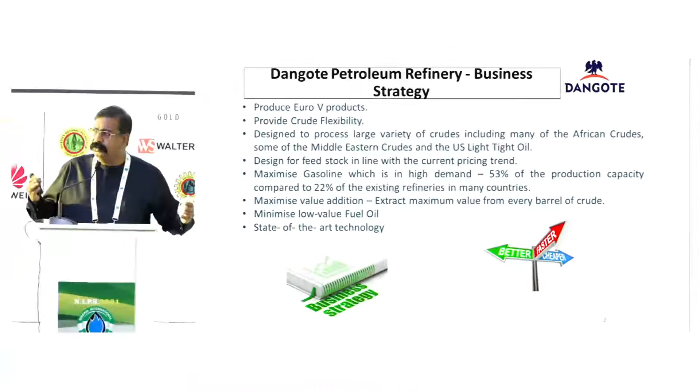This is to briefly give you an outline of the business strategy behind the refinery. The first strategy was that we should go for the best of the products, which is Euro 5. As you know, even in Europe many refineries are still trying to upgrade to Euro 5, and some don't have a plan to upgrade to Euro 5 but rather phase out the refineries. Because we were going for a huge volume, and we know that we will have to export a substantial quantity of products after meeting the demands of all of Nigeria as well as West African countries, we will have still products to export, especially gasoline, aviation jet, and diesel.

Specifically aviation jet and diesel. So if you have to go to those markets, we knew that it's good to have Euro 5 products today, so that in future we would not have any impact on our marketing strategy. So 100% of the production is of Euro 5. As you know, today we are using mostly AFRI 3 here, and we are trying to upgrade to AFRI 4.

Number two, we decided to have total crude flexibility, so the refinery will not be dependent upon products from any one particular source. We can process most of the African crudes and some of the Arabian crudes, and for example, the US LTO we can take 100%. So we have designed the refinery with adequate crude flexibility, so there will not be any dependency on any particular specific crude source, because it's a very massive investment, and the money is primarily going out from the pocket of an individual. So we wanted to ensure that all risks are mitigated. Before we started the project, we spent a lot of time assessing every possible risk and how we can mitigate those risks. So that was one of the outcomes of that.

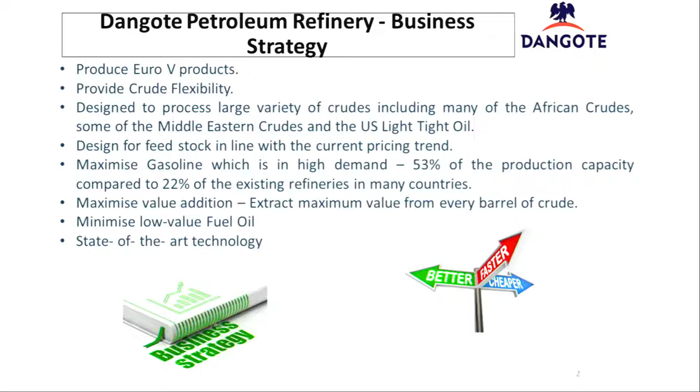Then the US LTO came in. As you know, the US was the biggest customer for Nigerian crude, our light and sweet crude. But then the US LTO came, they almost stopped buying the Nigerian crude and started pushing those crudes to other countries. Especially during President Trump's time, there was a very aggressive push, even to the Indian refineries, they started pushing. So the gap between the light and sweet crude and the dirty crude bridged. There was no point in going and investing heavily in dirty and heavy crude oil, in which case you'll have to have a coker, you'll have to have a VDU. So all those things we could avoid, and we built a refinery in line with the current trend.

Then we also looked at maximizing gasoline, because primarily we are building the refinery here, and the focus was initially the local market. Globally, most refineries are focused on diesel, which is the highest consumer product. But because Nigeria is totally different, with a gasoline-centric market, we maximized the gasoline production up to 53% of our production capacity, as against 22% globally.

And then we also went for another strategy, maximum value addition. So every barrel of crude which goes in, maximum value should be extracted out. If you see the black oil, the furnace oil, we used to call it here HPFO, LPFO, the volumes are extremely small. Whereas we have gone for even high-value products like polypropylene. So it has an integrated petrochemical complex. The value of the products extracted, they're all lighter products, petrochemicals. So the value addition is very high. That made the capital expense very high.

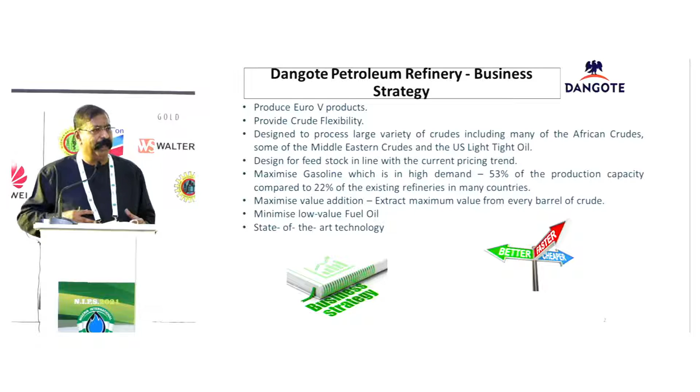So there was a lot of investment going in, and it made the complexity of the refinery very high. The Nelson index is quite high. But if you see the value extraction, it's also extremely high. So over a period of time, the margins the refinery can make is also extremely high.

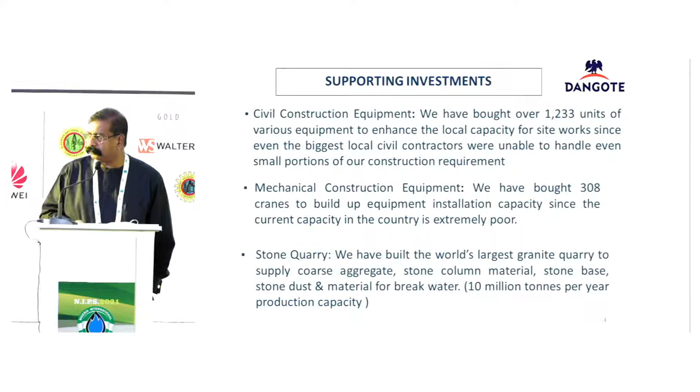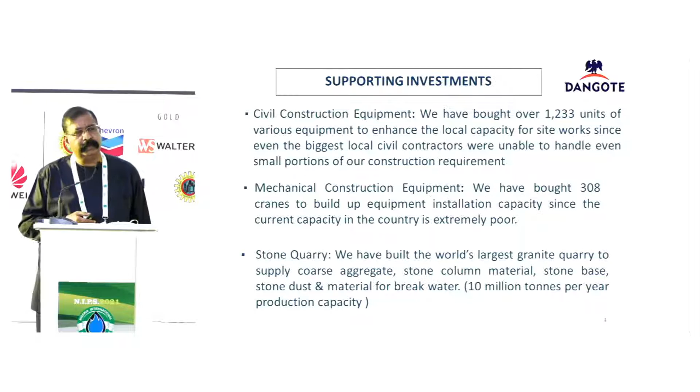And for the refinery, the capital investment became very high because we had to invest in a lot of supporting investments which are non-specific to a refinery. You can see civil construction equipment alone, we had to buy about 1,233 equipments just for civil construction, which covers dozers, excavators, front-end loaders.

Today, we probably have a larger quantity of construction equipment compared to large global companies, Saipem, Technip, JGC. We are almost equal with them, or we have a larger number of equipment.

Same thing with mechanical construction equipment. We had to buy about 308 cranes. You can count with your fingers the number of companies globally who have 308 cranes.

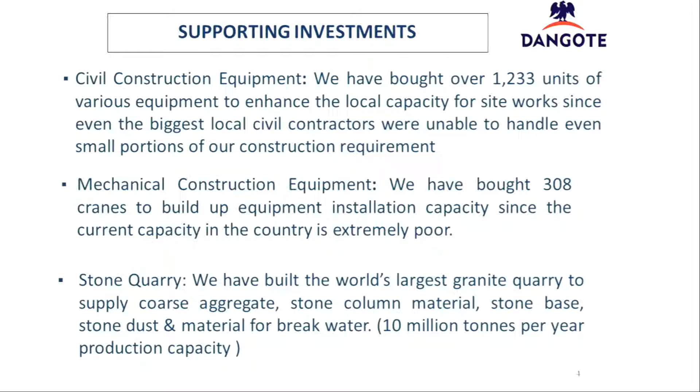At the stone quarry, we realized we would not be able to meet our demand of coarse aggregate for concrete production. So we invested in a 10 million ton quarry, which happens to be the largest stone quarry in the world. These are all investments which normally a petroleum refinery would not make. If you were constructing it in Europe, US, India or the Middle East, you would not be investing in all these items. But this made the refinery's overall investment quite high.

Then to move the sand and aggregates, we had to invest in another 1,000 tippers. For ready-mix concrete, we had to put up almost 13 million cubic meters per annum capacity, which is again supposed to be the highest capacity in the world in any particular location. Even in the Middle East, you will not see any area having 13 million cubic meters of concrete capacity, not even in an entire country.

And we had to develop a port because we decided to bring in huge sized equipment. The crude column, 110 meters, came in a single piece. The reactor regenerator, 3,000 tons, came in a single piece. The HRSGs, the heat recovery steam generators, almost as high as an 8-story building, also came in a single piece.

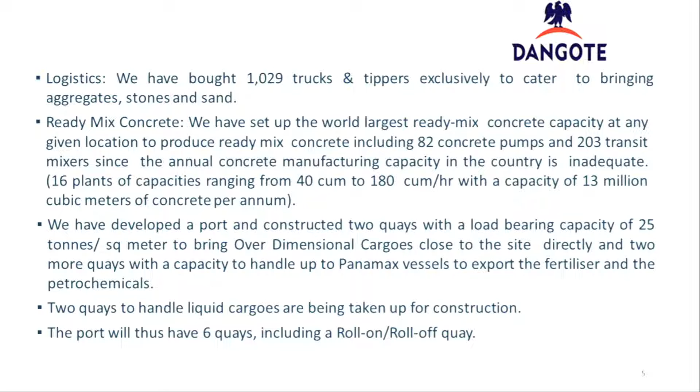So to bring those in, we had to construct a port. Normally Nigerian ports, which is the global standard, have a load-bearing capacity of about 2.5 tons per square meter for offloading containers, bulk cargoes or packages. This one needed 10 times that capacity, so we had to build a quay close to the site. We extended and built 2 quays for bringing over-dimensional cargoes. Now we've added 2 more quays totaling 220 meters each with a 14.5 meter draft, which can handle up to Panamax vessels.

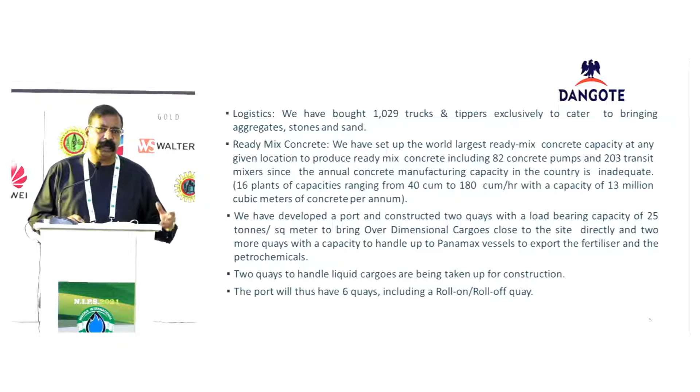So we can export fertilizer and petrochemicals from our site. We're also adding 2 more quays for liquid cargoes, since we already have a facility which we'll come to later. But if I have to take smaller cargoes to Warri, Port Harcourt, or Calabar, I don't need to use a huge SPM, so we're trying to build 2 more liquid cargo quays.

We even had to build oxygen acetylene plants because the welding gases in the country were not adequate. We had to build accommodation for 50,000 construction workmen on site. People thought we were overspending on construction accommodation and temporary housing, because of the air-conditioning, treated water facility, and sewage treatment for 50,000 people. You can imagine, it's not a small facility.

But it helped us a lot during the COVID period, during the lockdown. Every time, the people were all accommodated inside. So it did help us a lot.

In addition, the site was so bad that we had to develop swamp buggies too, since the swamp buggies in the country were not adequate, so we had to import them.

We also realized we are very close to the ocean, and as you know, with global warming coming in, Lagos is mentioned. If you just Google it, you'll see Lagos as one of the cities which can potentially start going underwater. So we decided to raise the height of the site by 1.5 meters across the whole area. We had to pump in more than 60 million cubic meters of sand to elevate the height, which cost us another 300 million euros exclusively for that one.

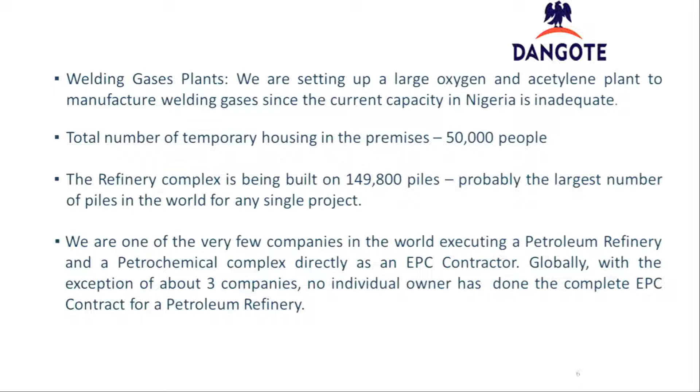Of course, we had a reason to do it, because we know when we go to these big companies, first of all, they charge a huge premium. For this project, at 650,000 barrels, they said the capex would be about $30,000 a barrel, so it would cost about 19.5 billion, and they'd charge us about 10% minimum as a fee.

They said it would cost us about $2 billion just for the EPC fee. When you sign a contract, all the risks they mitigate - they will not take 100% of the risk. They will cap their risk to maybe a maximum of 15-20%. So you pay a fee and still take the risk back on yourself.

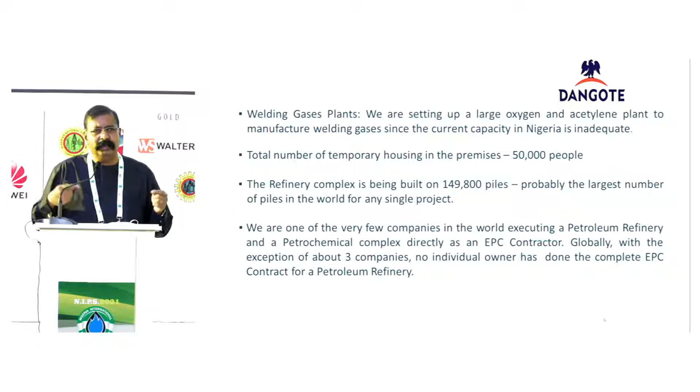So we decided we'll take the full risk and do it ourselves - the same reason we did for the construction equipment. Why did we have to buy it? If I give it to a contractor, they bring their equipment, I'll have to ship it in and ship it back, and they'll just depreciate the whole cost of the equipment on one project. Plus they may be bringing old equipment which can break down and affect my progress. So we decided to invest in brand new equipment.

So there were reasons behind all these decisions, which is actually helpful for the project. And the infrastructure is quite high.

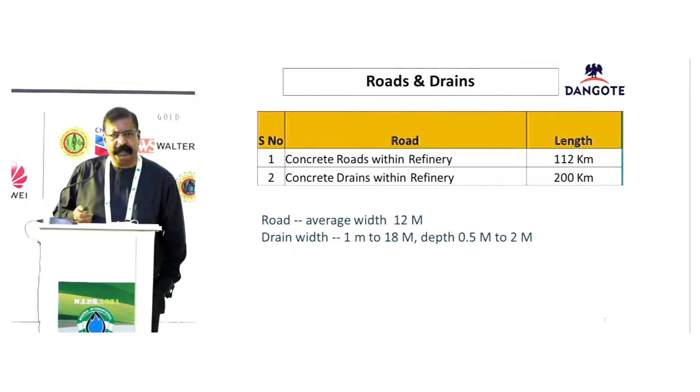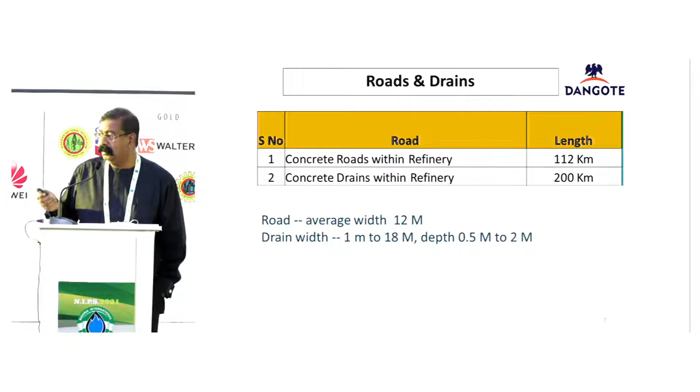I talked about the sand filling, more than 60 million cubic meters. Within the refinery, we have 112 kilometers of concrete roads, 200 kilometers of drains, and they are not small. The roads are about 12 meters wide. Drains are as narrow as 1 meter - some as wide as 18 meters, and some as deep as 2 meters. You can see they are like mini canals.

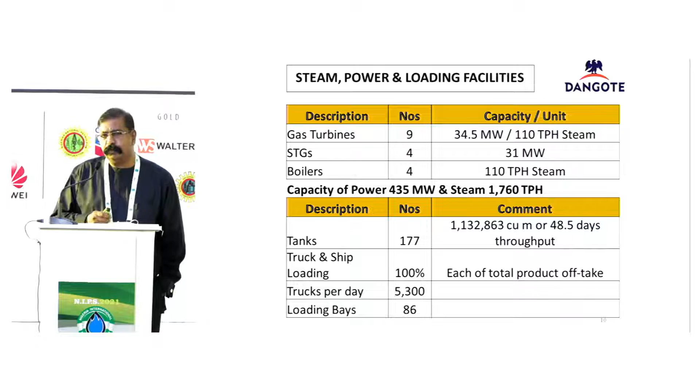Then the steam and power facility - we are building 435 megawatts of power within the refinery. We have 9 gas turbines, 4 steam turbines, and then the tank farms. We have 177 tanks. Then the product evacuation.

We have built total flexibility. 100% of our production can be evacuated by sea. 100% of our production can be evacuated by road. So depending upon demand, we have total flexibility.

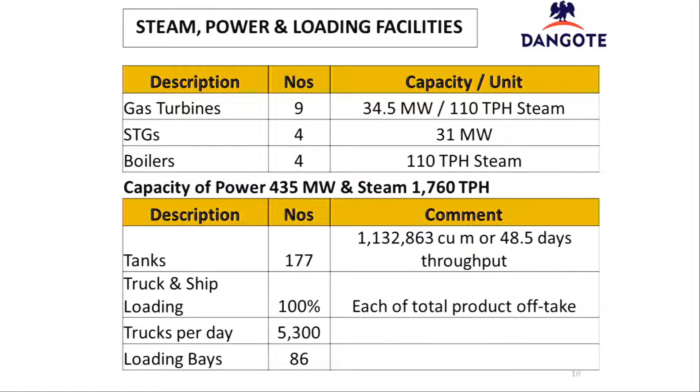Then we have the marine facilities. To bring in the crude, we have 2 crude SPMs, and to export the products, we have 3 product SPMs. We had to do about 120 kilometers of subsea pipeline to receive the product from the crude SPM and to take out the product from the product SPMs.

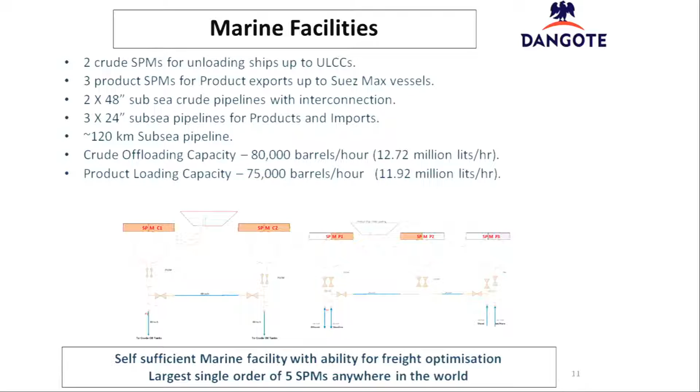For product, normally the biggest vessels handling product are like LR1, Suezmax vessels. We can bring a Suezmax, and we can load a Suezmax in less than a day. I can offload a ULCC in less than a day. So the vessels that come in offload within a day or load within a day and leave. The freight cost will be very substantially low because the waiting time is extremely low.

And I talked about the 177 tanks - this is the storage capacity. We can store up to 11 days of Nigeria's total consumption of gasoline, and up to a month's requirement of diesel, and about 22 days of kerosene requirement. So this will actually act as a kind of strategic reserve for the country. We have built in substantial storage capacities.

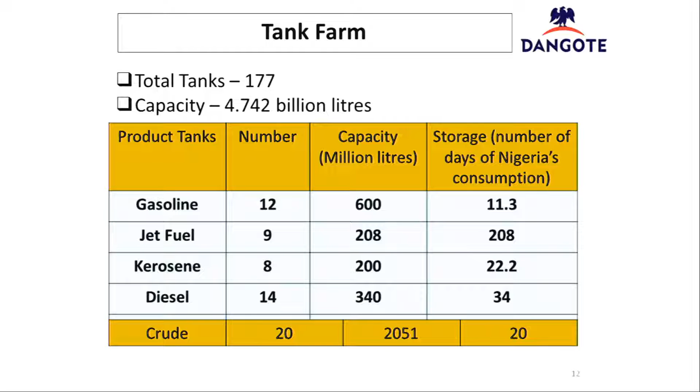So now we'll come to the critical issue which people are quite interested in. Yes, we are talking about this refinery - where are we? When are we going to finish the refinery? When will production start?

The journey so far: 100% of the piling work has been completed. 98% of the RCC work has been completed. Tankage, 94.6% completed. Structural steel, same, 97% completed. The underground piping, almost 100% completed. Now above ground piping is 80% completed. So currently the focus is on above ground piping, followed by electrical and instrumentation.

You can see the overall project progress. If you look at the EPC portion, 95% has been completed. Then if you take the enabling works - infrastructure, marine, construction facilities - all put together, almost 90% has been completed. But the critical activity is the construction, because engineering has been done, procurement has been done. The focus currently will be on construction.

If we take construction alone, we have completed 79% of the construction, so 21% is left out. Out of that 21%, not all of it is essential for commissioning the refinery - there may be some road works which are not critical for commissioning. So if you take the remaining functional scope, it is 16.58%. That is what our focus is upon to finish and start up the refinery today.

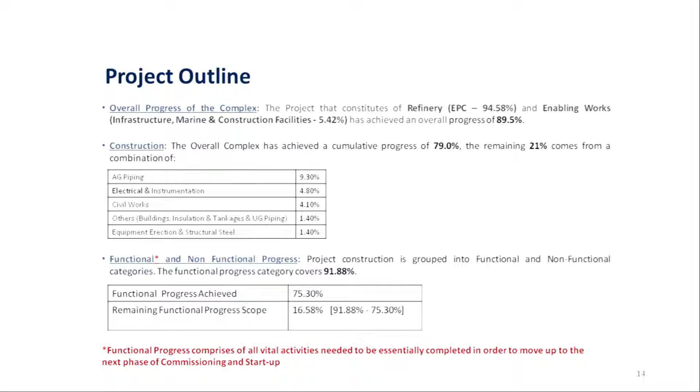We can see the breakup again, same as I described. Equipment erection is at 82%, so we have some balance to finish. Above ground piping is at 80%, which also has some balance work left. The rest is more or less finished. The other areas we're focusing on are electrical, instrumentation, and insulation.

We've been given a target date for electrical, instrumentation, and insulation. We want to finish it by 30th November of this year.

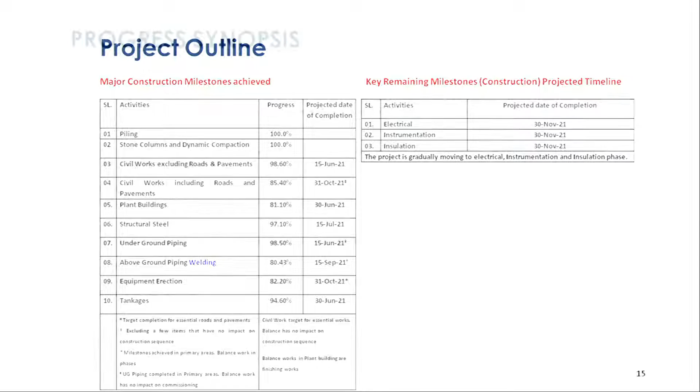I talked about the same completion progress, but the mechanical completion target is to finish by the end of this year. To achieve that, we have to start the test packs, like compressed air blowing of the pipelines, followed by commissioning the boiler and steam blowing of the pipelines, and hydraulic testing of the pipelines. We've already started that in parallel.

You can see the overall test packs. We're estimating about 15,400 test packs in total. Out of that, in the finished product tank farm, 128 test packs have been completely finished, including mechanical and hydro testing.

In the primary blocks, which is the crude distillation unit, the resid fluid catalytic cracking, the motor spirit block, and the mild hydrocracking block, out of 989 test packs, 931 have been finished in mechanical completion, and 893 have completed hydro testing.

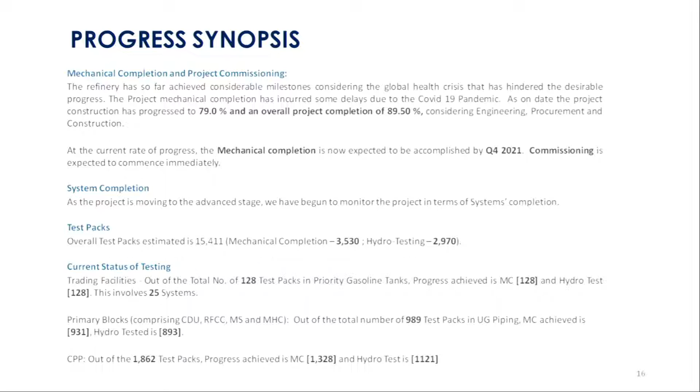Then the CPP, the captive power plant, out of 1,862 test packs, 1,328 have been completed and 1,121 hydro testing completed. That gives you an idea of the progress. It's not just mechanical completion, but also the test packs to be done so we can switch on the plant. So we're already doing that work in parallel.

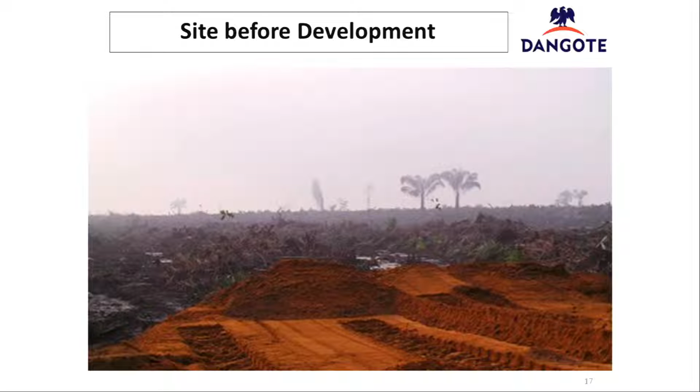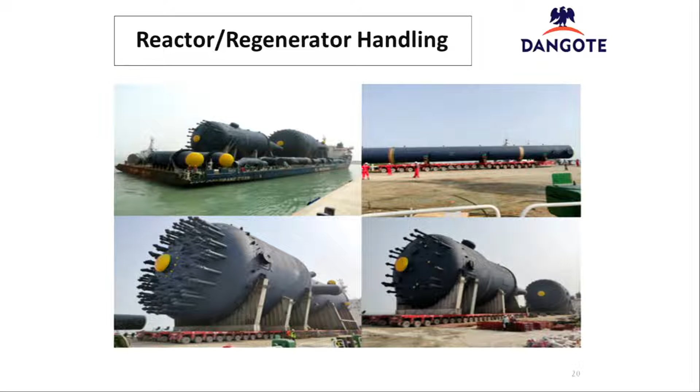This is a 3,000-ton piece, which came as a single piece. You can see it arriving in the sea and then getting offloaded and taken to the site.

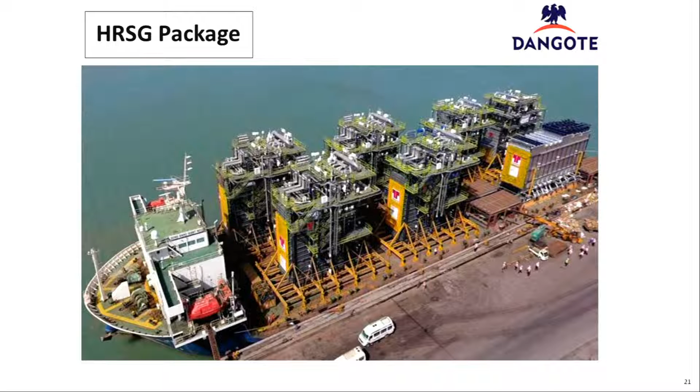And these are the heat recovery steam generator packages - about 8-9-story buildings, all came in single pieces. You can see 1, 2, 3, 4, 5, 6 steam HRSGs coming in.

The SPMs have already been installed. As I said, the hoses are already linked up, so the vessel can come in and hook up to the hose and discharge the crude. We have similar SPMs installed for the product. All 5 SPMs have been installed already.

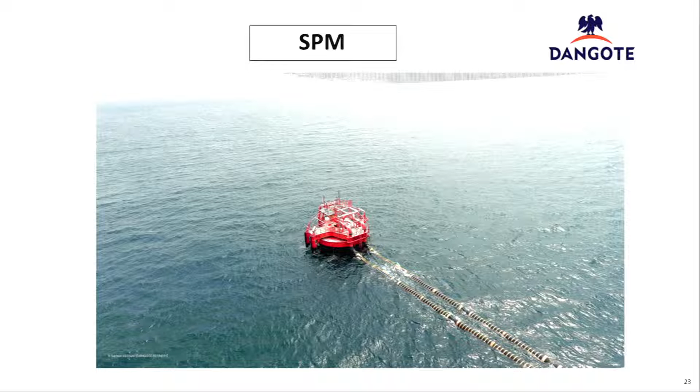And all the pipelines, everything has been tested. So the SPM is ready to receive the crude, or the other 3 SPMs are ready to take out the product.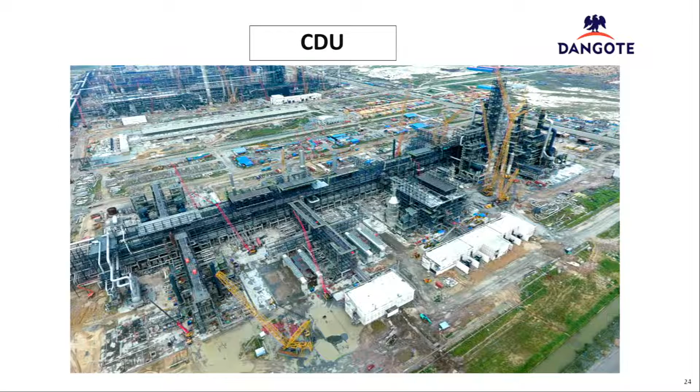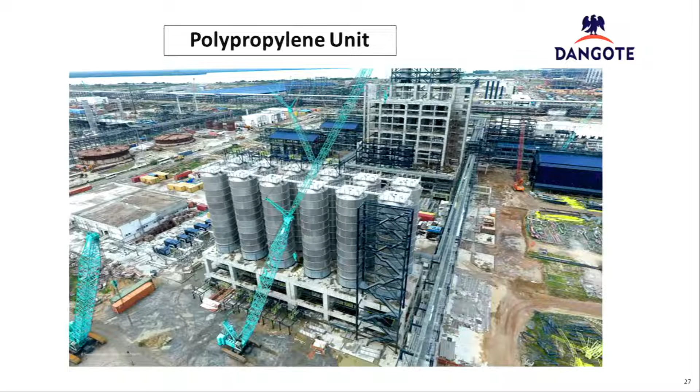This is a picture of the crude distillation unit, the mild hydrocracking in the front, and the RFCC, the resid fluid catalytic cracking unit, in the back. The motor spirit block, the polypropylene unit, the aerial unit - part of the refinery. We have almost 19 blocks total, so we've just taken pictures of a few of them.

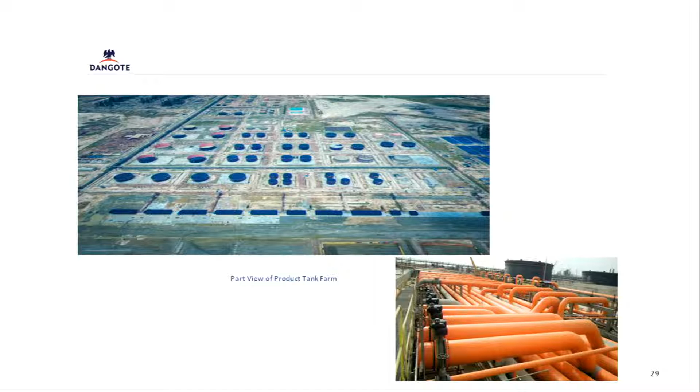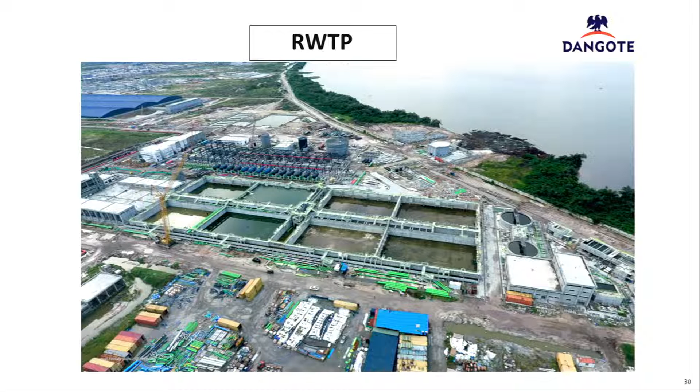This is a raw water treatment plant. You can see the raw water treatment tanks and the receiving tanks and the raw water treatment plant. This is the treated water holding tank, which is about 400 million liters capacity. Then at the back, you have the reverse osmosis and the demineralization plant.

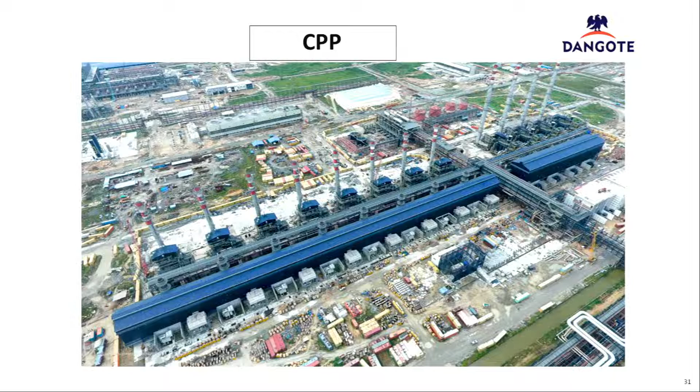This is a captive power plant. You can see the stacks of the 8 HRSGs with the gas turbines and then the 4 high pressure boilers.

This is an overall aerial view of the picture.

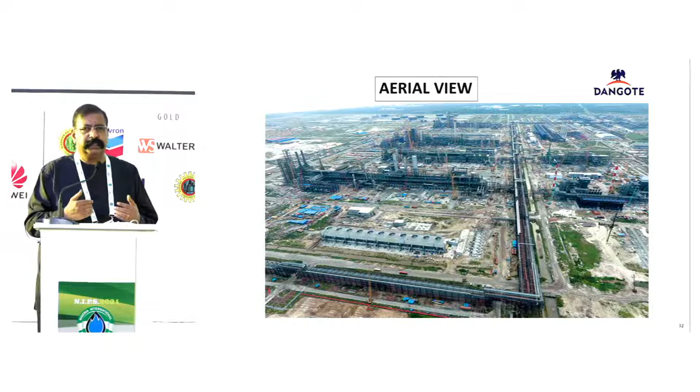To put it in a nutshell, the refinery concept was brought in knowing that the country is in deficit of the products, so we can always have a ready local market. We also knew there is a lot of ready market available in the West African countries and to some extent the Central African countries. Obviously, we cannot compete in the East African countries in terms of freight because Middle Eastern crude will be coming in, and they also have the advantage that most of them are state-owned refineries with their own crude. So our focus was West Africa, Nigeria, Central Africa.

Then the surplus to be exported, we are looking at the South American market and the European market. That was one of the strategies which drove us to go for Euro 5, but then we decided that when we're going for Euro 5, we'll go for Euro 5 for 100% of the market products. So that strategy drove us.

We originally were looking at various alternative sites. We originally wanted to go for the Olokola free zone, but then for strategic reasons we moved to Lagos. The buildings are constructed in the Dangote free zone. We took up a free zone, registered under NEPZA with Dangote as a Dangote free zone, and it is being constructed in that location.

And I told you the challenges, including the challenge we have taken on ourselves of being the EPC contractor. I have given you the construction status. If you have any questions, I'm ready to answer.